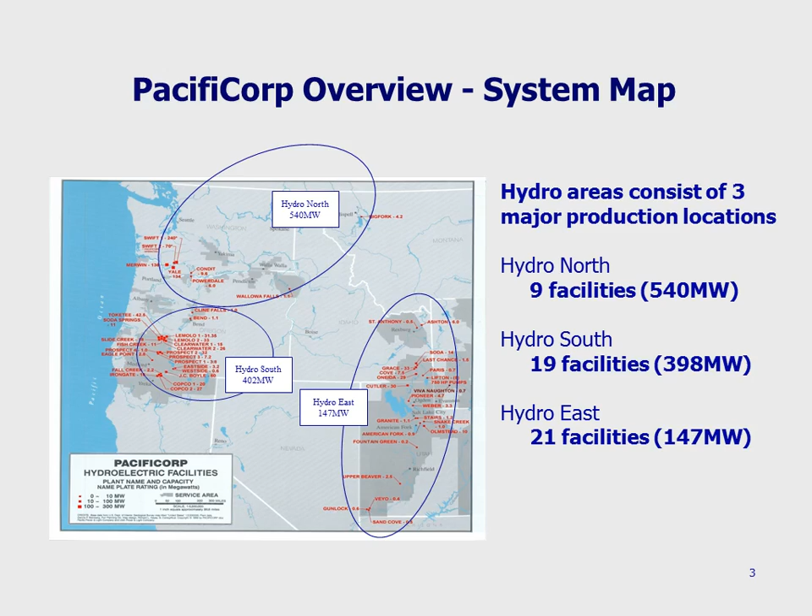So, PacifiCorp Energy, we are a large electric utility with, I think, upwards of 2 million customers. Our service territory is in Utah, Wyoming, Idaho, where we do business as Rocky Mountain Power, and Washington, Oregon, and California as Pacific Power. Hydro is only about 10% of our total generation portfolio, but as what the company considers a renewable resource, it is very important to our hydro generation.

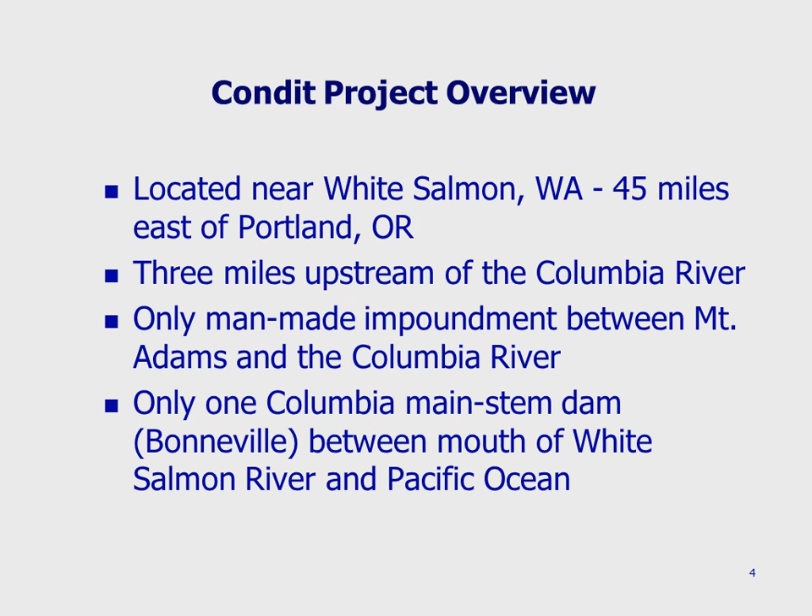The Condit project is located in White Salmon, Washington, on the White Salmon River. It's about 45 miles east of Portland. The dam was 3 miles upstream of the Columbia River. It was the only man-made impoundment between Mount Adams and the Columbia River, and there's only one dam on the Columbia between the White Salmon and the ocean.

Project location, you can see, where's the, now what? Center button. Oh, there we go. Okay.

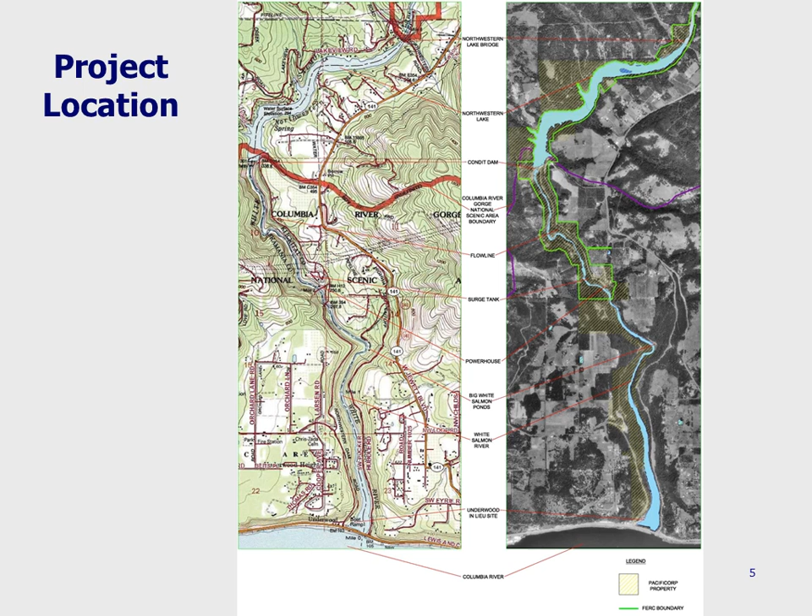The reservoir was about 2 miles long. From the map, you could see it was kind of a long, skinny reservoir. 92 acres total, fed by the south side of Mount Adams, which is glacier fed. And the most important thing about the reservoir to remember is there were 2.4 million cubic yards of sediment trapped behind the dam.

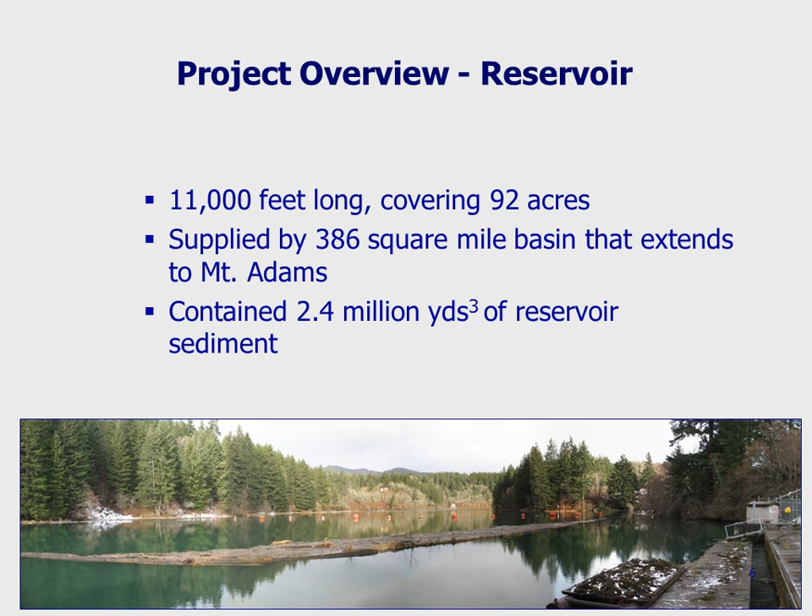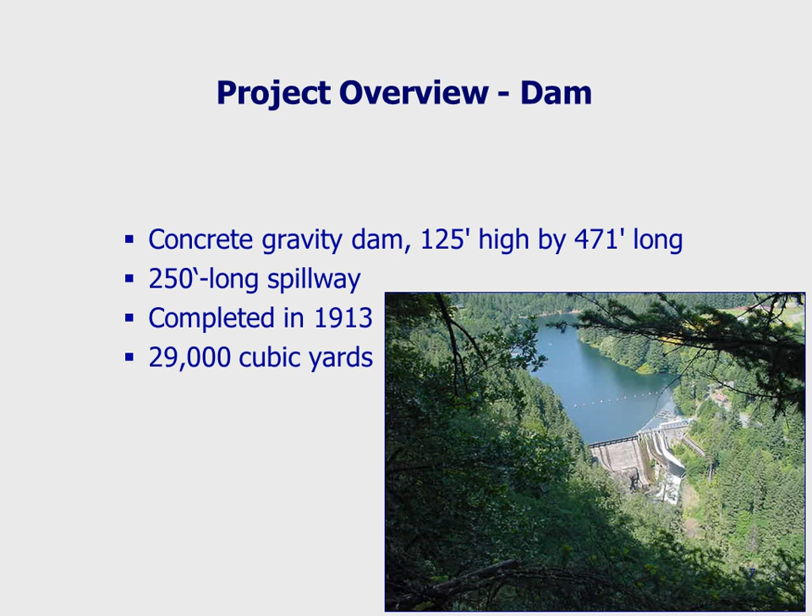The dam was, I guess you would say, a moderate-sized dam compared to some of the enormous dams we have in the Southwest, but it was 125 feet tall and 470 feet long. And the important thing to remember about the dam is it contained 29,000 cubic yards of concrete.

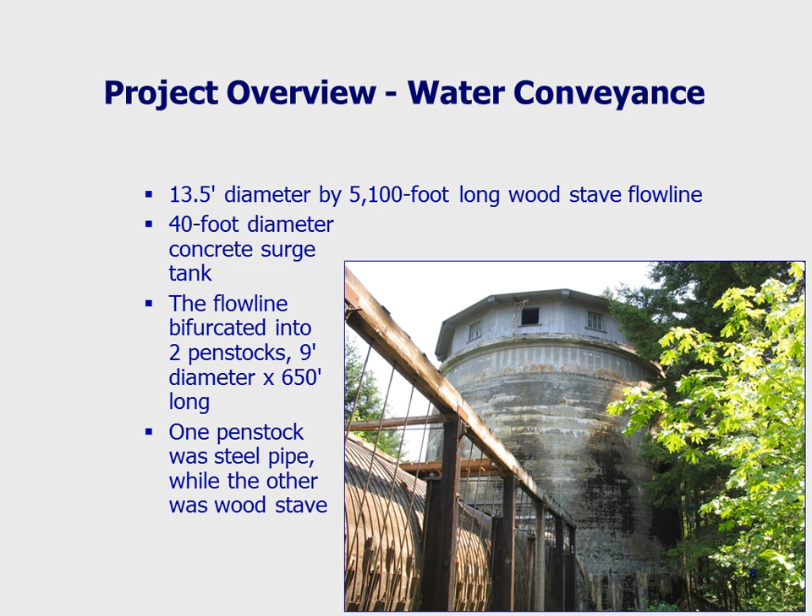So the project had a water conveyance system, which was essentially this large wood pipe that you see on your left that fed into a surge tank. The surge tank then divided into 2 pipes called penstocks that fed the powerhouse. And the most important thing about the water conveyance system is it was about 1 mile long. So there was essentially a road cut along the east side of the White Salmon Canyon, and the flow line was built in this road cut.

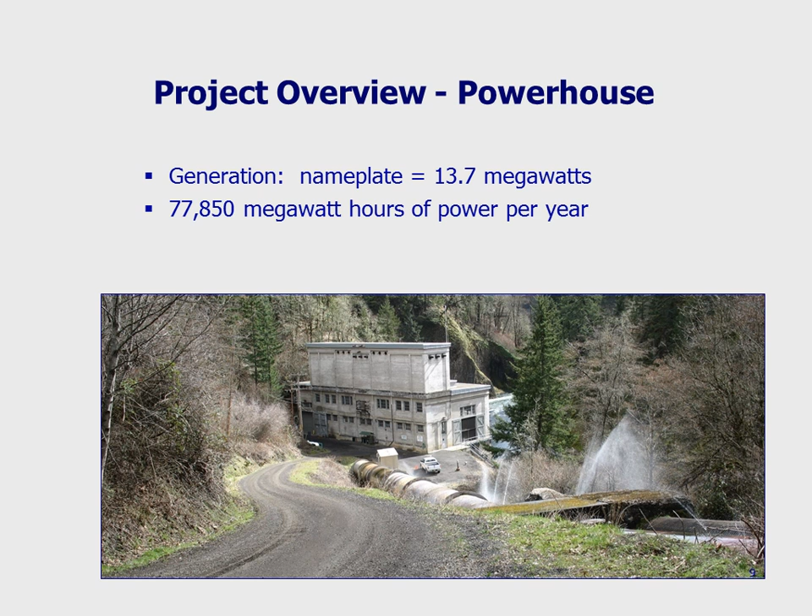So the powerhouse was about 14 megawatts, and that's about 77,000 megawatt hours of energy per year, which is roughly enough energy to power about 7,000 homes. So not a huge project, but moderate size, modest, we would say.

As most of you probably know, any non-federal hydropower project requires a license from the Federal Energy Regulatory Commission, and we have to renew those licenses periodically. Condit was actually built in 1913. It went for many years without a license. For some reason, I'm not exactly sure why, the company had to get a license in the 60s. It was a 30-year license, so that license came due in the early 90s.

And FERC, as we call them, must go through the NEPA process to issue a new license. So therefore, the company had to prepare a license application with detailed information on power, the need for power, environmental resources, cultural resources, recreation, and the socioeconomics of the project.

So for a quick chronology, the company began working on the license application and preparing studies in December of '88. The application was filed in December of '91. Fish and Wildlife Service basically placed fish passage conditions under the Federal Power Act. The Fish and Wildlife Service and NOAA Fisheries have the ability to require fish passage at the project. The project had no fish ladders.

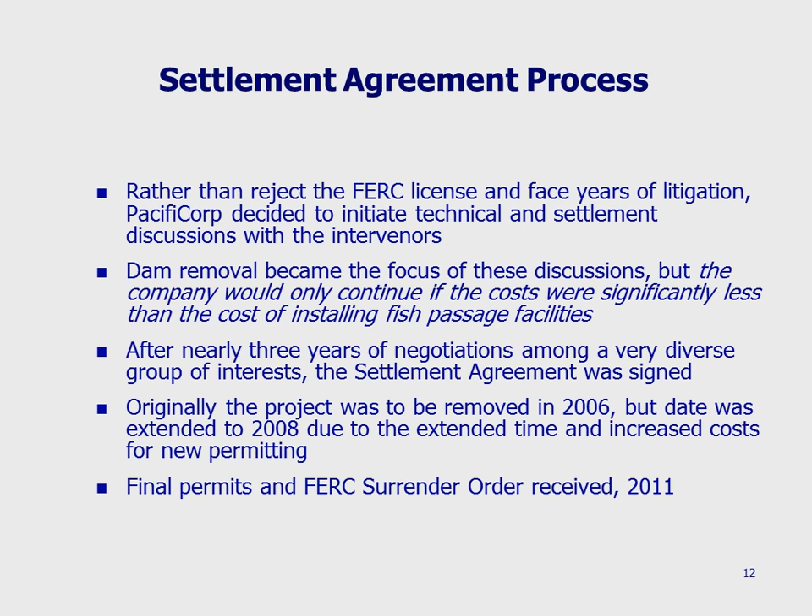So the details of the agreement called for it to be removed in 2006. The agreement was reached in '99. Everybody knew there was going to be a lot of permitting involved. So initially, we were supposed to remove the project in 2006. We, however, did not get the final permits and the FERC order until late 2011 and early 2012.

So certainly there were a lot of NGOs involved, and the main services, federal agencies involved, but it was really largely CRITFC and the Yakama Nation that were the first ones to really propose removal in a serious way, and they were quickly followed by the agencies.

So just a quick look at chronology. We entered settlement negotiations in '97. We reached agreement in '99. We had to go through a whole NEPA process for the removal, of course. We had to get a biological opinion on removal because there's an endangered salmon in the river. And then in July 2004, we started this long, arduous process of pursuing a 404 and a 401. And that's really what took so long.

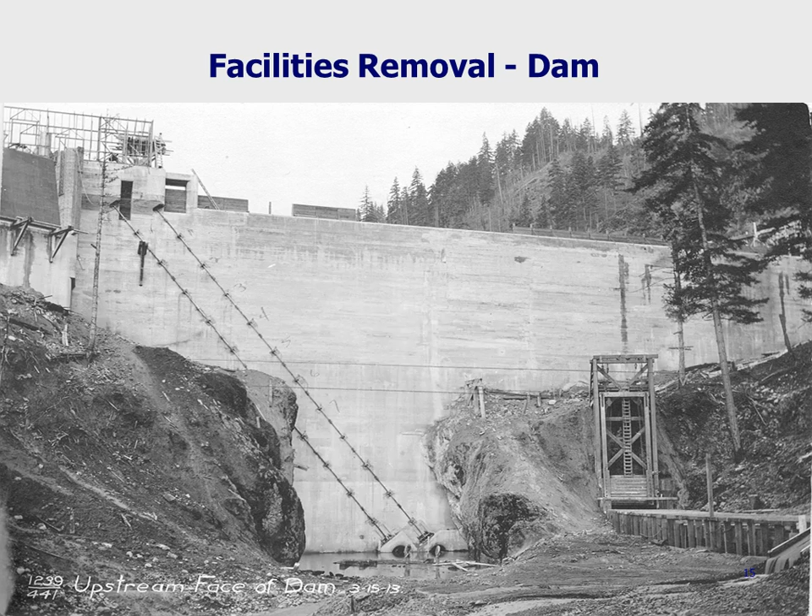Looking at what the removal project calls for, this is an original photo of the dam right before the reservoir was inundated. This is the diversion structure. So the entire flow of the river was diverted through this tunnel under the dam while the dam was constructed in the dry, and then they filled this tunnel with rock and blocked it. Dam is gone. That's the big plan, remove the dam.

So how do you remove the dam? We blast a tunnel from the downstream side in the very bottom of the dam right here. These are the sluice gates that were installed to sluice sediment out of the reservoir, which, interestingly enough, were initially installed with the construction of the dam with the intention of sluicing sediment annually, and they never did it. Not once did they ever open those gates and sluice out sediment, because they were so afraid that a log or some debris would get stuck in there that they wouldn't be able to close them, and the whole project would become basically a failure.

So in order to remove the dam from the downstream side, we coffered it off and began excavating this tunnel. The dam is about 100 feet thick at the base, and so we basically tunneled in 90 feet with blasting and excavators, just removing mechanically the concrete out of the tunnel. And then on breach day, by dynamite charge, blasted out the last 10 feet and drained the reservoir in one quick

instant, basically. So initially, the thinking was that it would take about 6 hours to drain the reservoir, and that the flow would be around 10,000 CFS, which is not really that high of a flow for this river. That was well within a 3 or 5 year flood, I believe. Once the reservoir is drained, the entire flow of the river is going to pass through that tunnel for about 9 to 11 months or so.

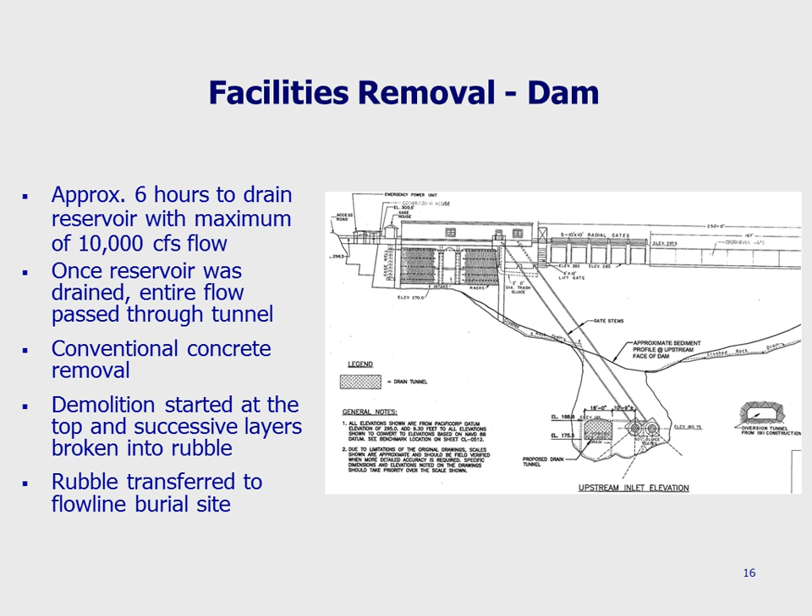We're doing a typical concrete removal, basically breaking it up with jackhammers that are mounted on large excavators and hauling it off in trucks, breaking it up into layers. And then the last bullet, and one of the big issues was finding a place to dispose of the concrete. We'll get back to that. So other facilities to be removed: the whole water conveyance system. Those are the penstocks on the right on their way down to the powerhouse.

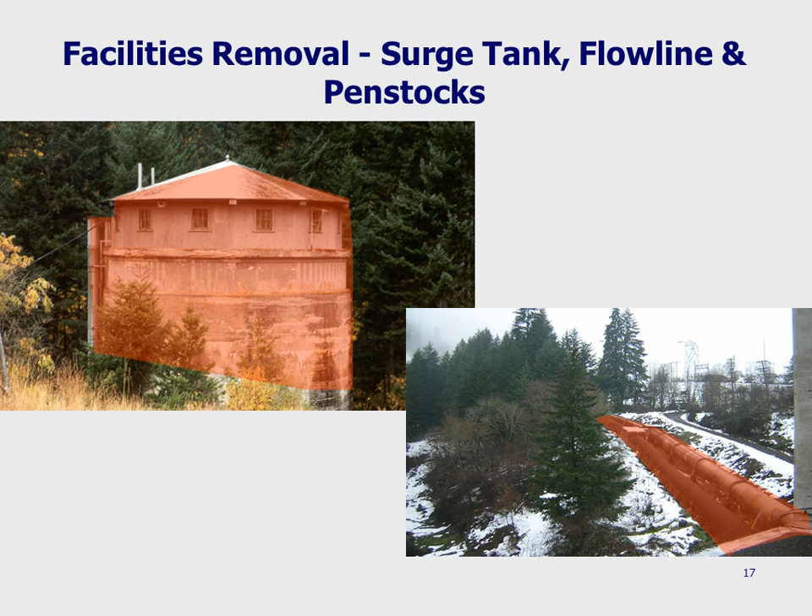The important thing to know about the Flowline removal is this road cut I was mentioning earlier, and that wound up being the place where all of the concrete from the project was disposed of. So we buried about 35,000 cubic yards of concrete along this road cut. It wound up being about 3 feet thick, and then we covered it with soil and are going to revegetate it.

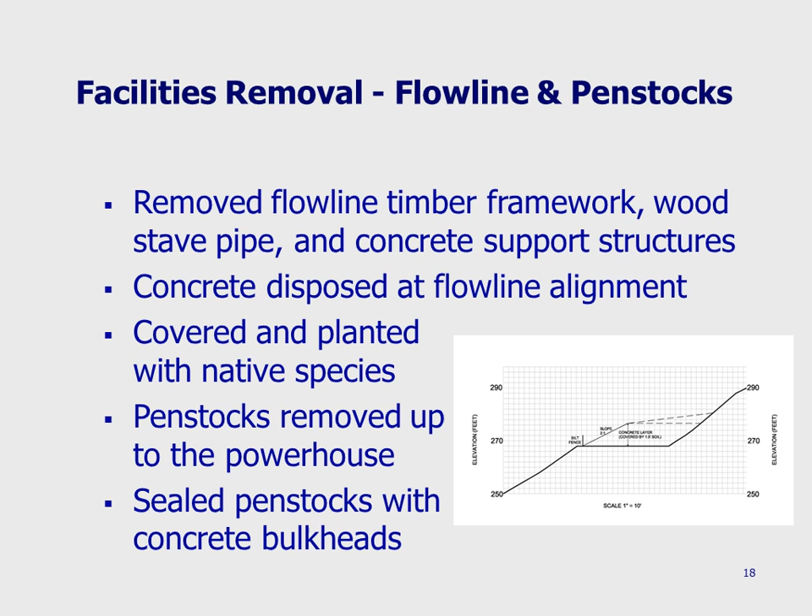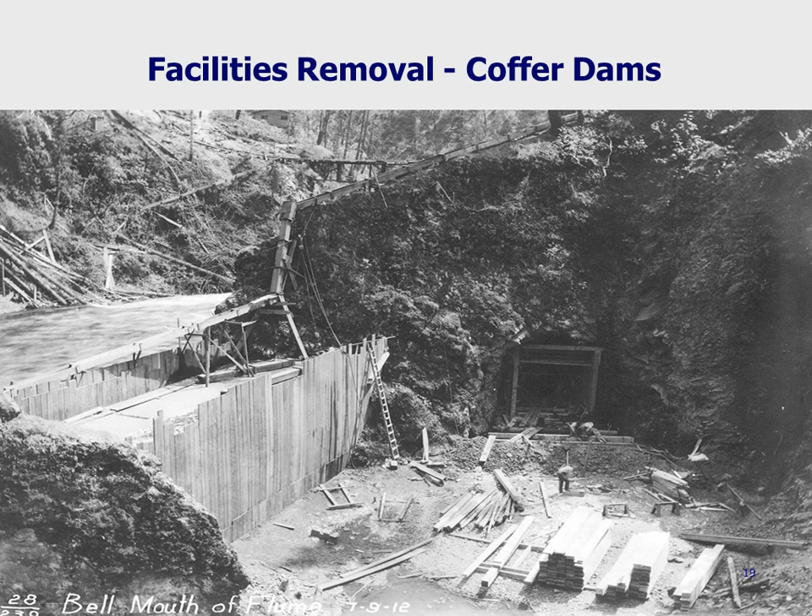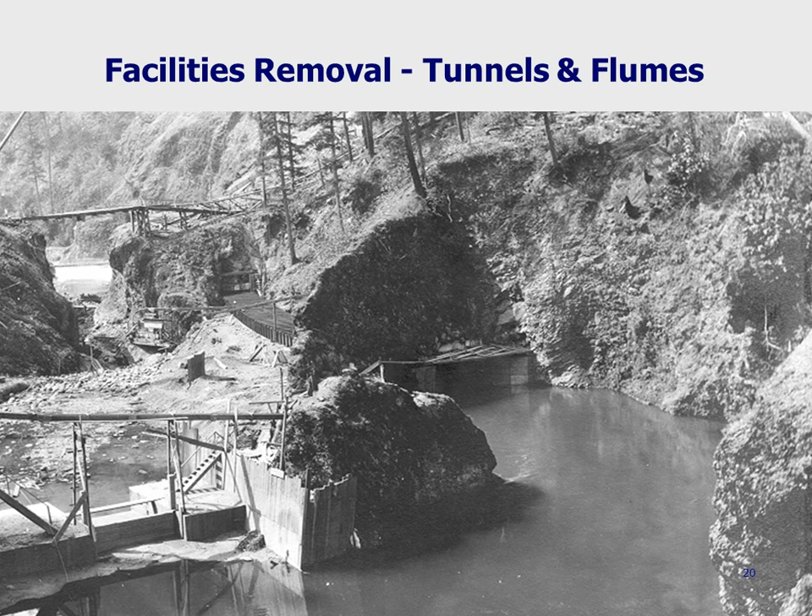So other facilities to be removed: there was a very elaborate coffer dam and diversion system. So that's all going away. This is the dam site right here. The dam was built right there. So this is just a historic construction photo; all of this stuff was just inundated and left. So the company had to remove all this material.

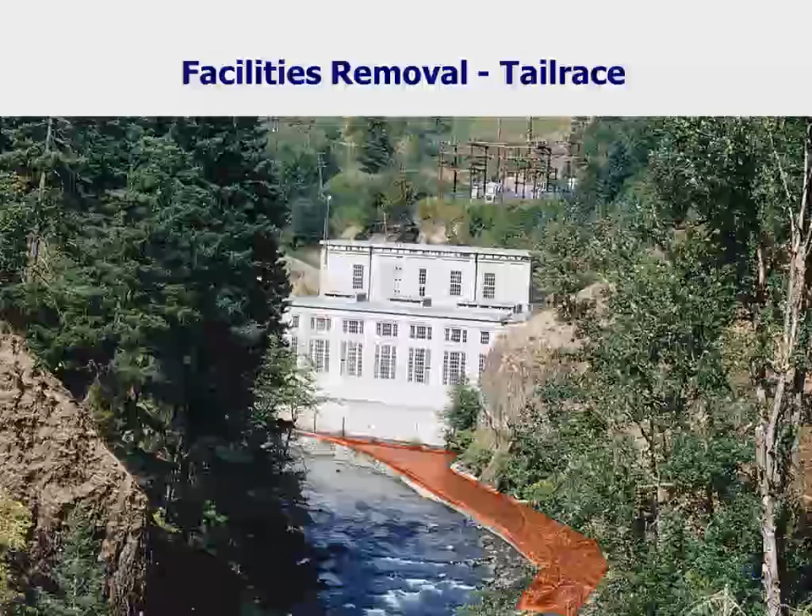This is the powerhouse, the only facility of the project that was to remain. The whole hydro project was National Register eligible. It was very key in electrification of the region. It was actually built by a paper mill company just outside of Portland in Camas, Washington. So the only portion of the powerhouse that was to be removed is this tailrace feature, which had obvious fish habitat issues with it. So we had to work in the wet to essentially remove that.

So back to our chronology. In August 2011, we began decommissioning efforts. By October 2011, we ceased generation. So we did generate all the way up until breach day, just about 45 minutes or so before the breach. They shut the powerhouse off for the last time. By January 2012, we were beginning demolition of the dam. By February 2012, we began grading in the former reservoir to try to get rid of all of that sediment that was behind the dam.

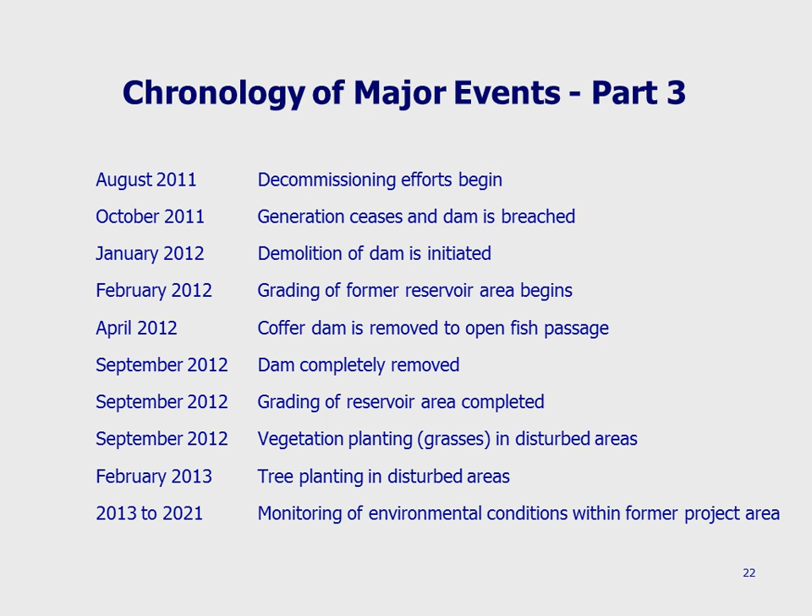By April 2012, that coffer dam we talked about was completely removed. By August 2012, we saw anadromous fish moving upstream. There were steelhead above the dam site, so they literally swam up the tunnel that summer after the breach. And then by September, we had the dam completely removed and began the process of revegetating, which we are still currently working on. And then in the future, we're going to be doing some ongoing environmental monitoring. So one of the conditions of our 401 application is that we monitor the situation, sediment in the river, for the next 10 years.

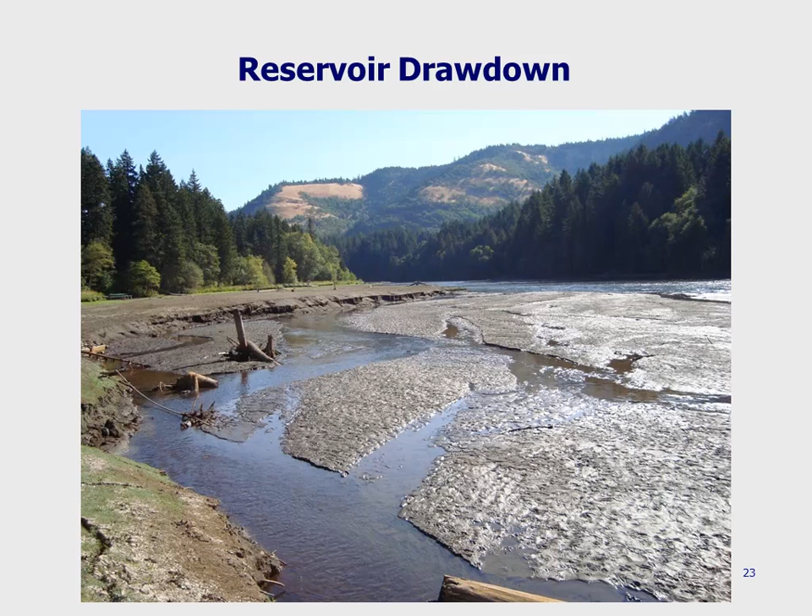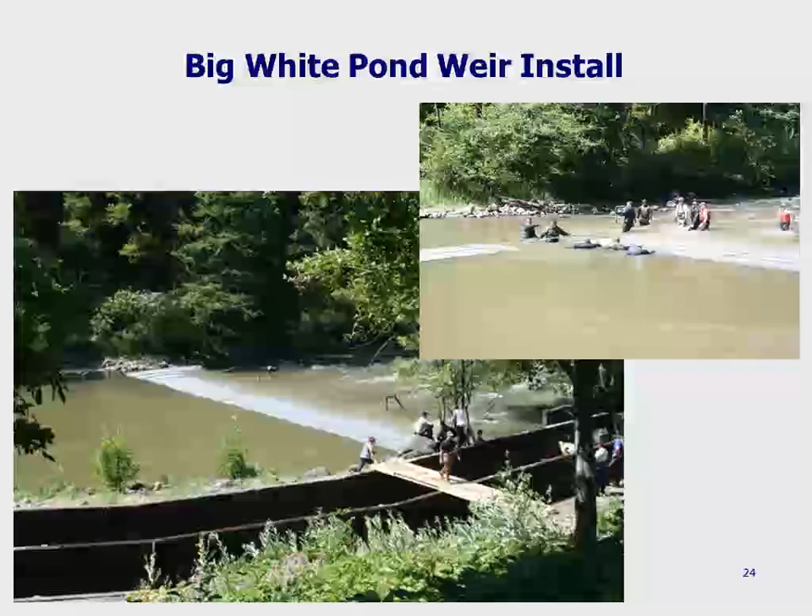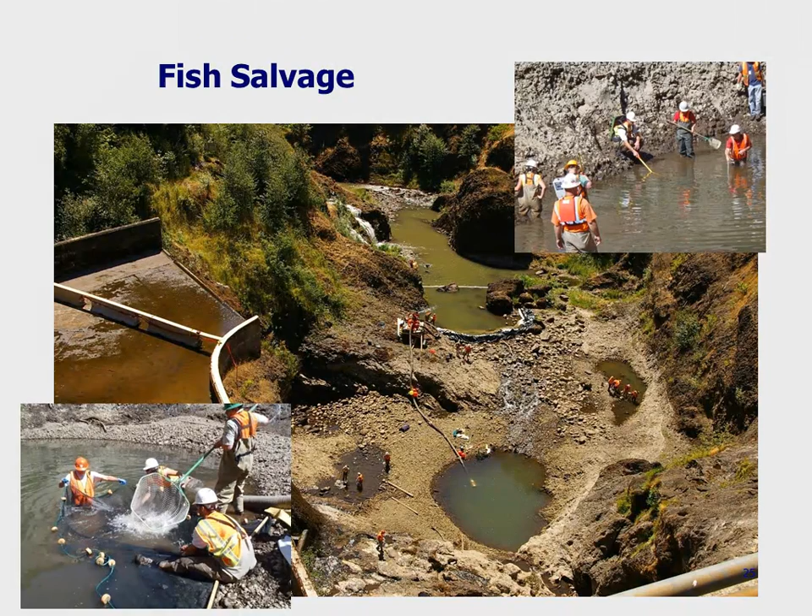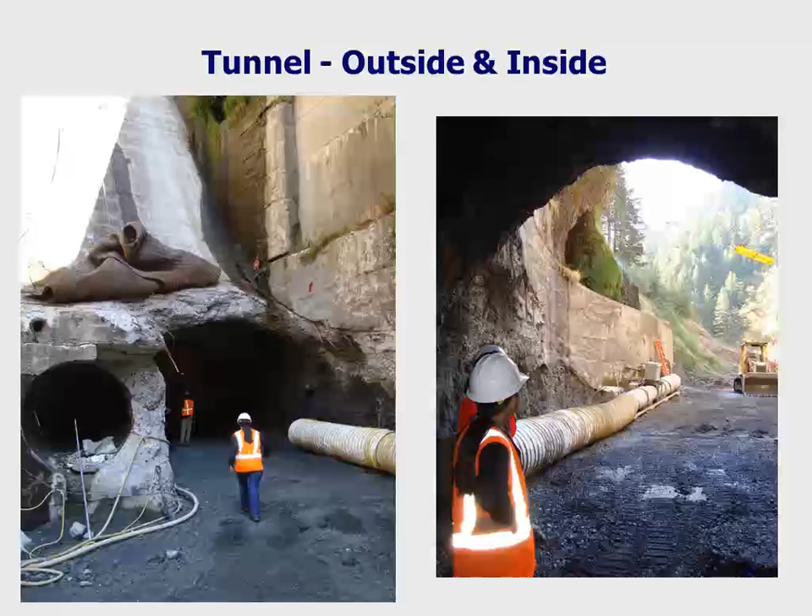So really quickly, the first step was drawing the reservoir down to minimum pool. We installed a fish weir below the dam. This is prior to the breach, trapping salmonids, releasing them upstream so that they could spawn above the dam site, knowing that the spawning beds below the dam site would all be obliterated by the breach. We then did a fish salvage. This is immediately below the dam. We maintained a minimum in-stream flow by tapping the penstock right there. So that water is coming directly out of the penstock. We're still generating at this point. Then we began the process of tunneling on the downstream side of the dam in the dry. Here's a couple of looks inside the tunnel.

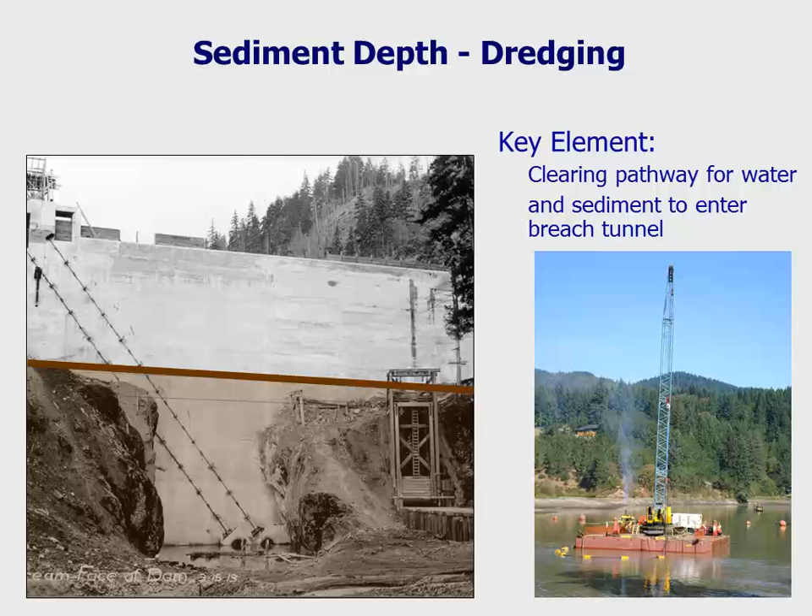The sediment issue. So the picture on the left indicates the sediment level up against the dam. Clearly, a lot of sediment needed to be moved out, and we had to dredge out the sediment on the upstream side down to the base because the hole's going to be here. So this dredging operation went on for about 3 months to basically remove all the sediment to create that bathtub drain.

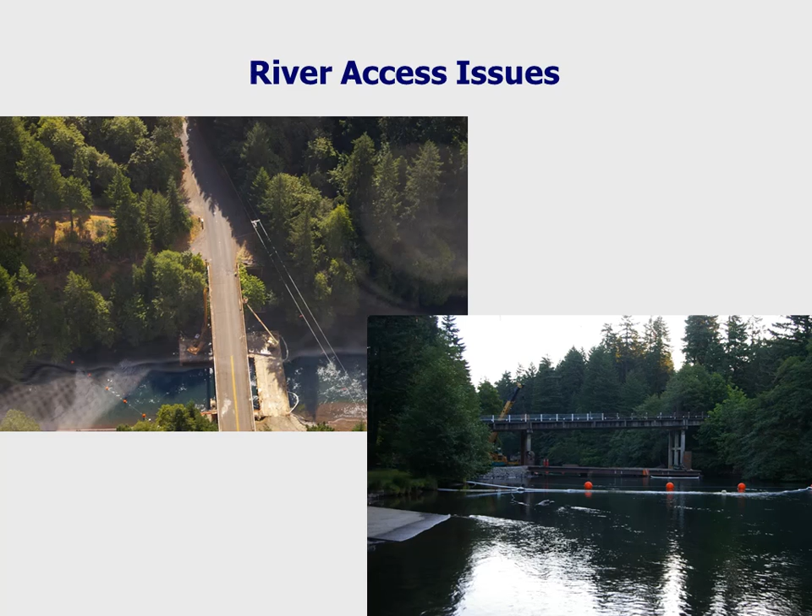Well, the bridge was engineered to be sitting on a reservoir, not on an active river channel. So we had to completely rebuild these two pylons and constructed this pier all the way across the channel. So there was no way in the world for rafts to pass through here. And what we wound up doing was the cabin owner, there's a cabin right in this area, was nice enough to allow us to basically take over his property. So rafts would take out right above this boat barrier and walk up this scaffolding that we built, and we built a hot loading zone and turnaround in his backyard.

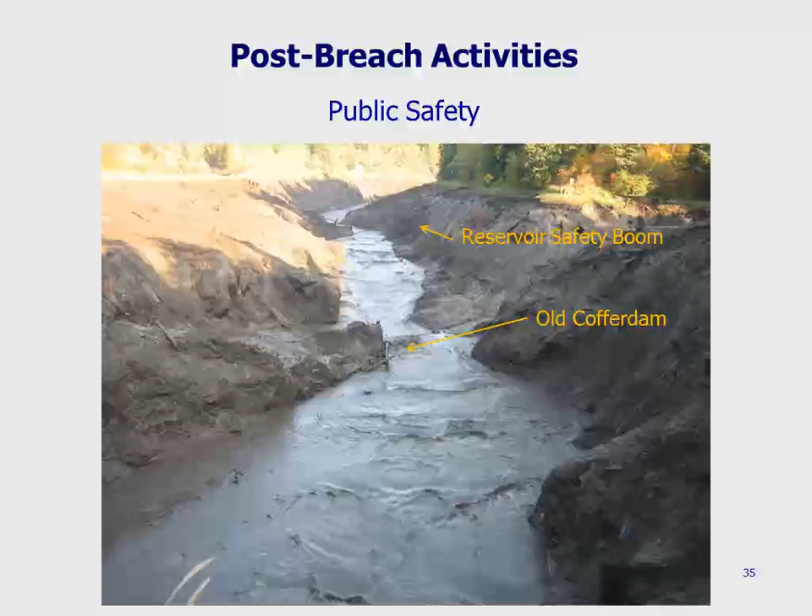There were a lot of public safety concerns. Obviously, this whole project was a huge interest to the public. All these slopes are very unstable, waterlogged, fine sediments. Our old boat barrier became this broken cable in the river. We've got this old cofferdam. Here's a picture of the coffer dam several months later.

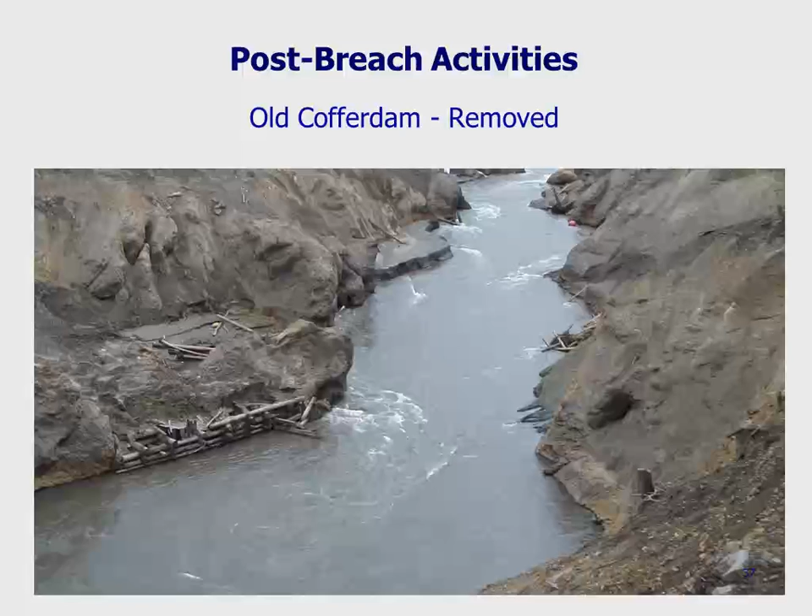Clearly a boating hazard. So we had to really do a lot of due diligence to maintain public safety and keep the area clear. We did remove the cofferdam, which was a very elaborate operation in and of itself. They had to construct a road down this drainage and literally just broke it up with 2 excavators and pulled it out.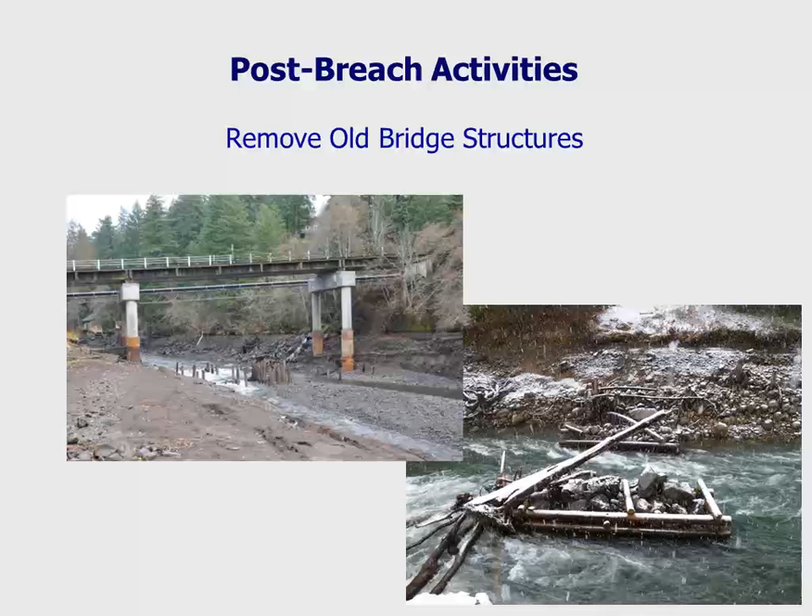Another issue was, this is back at the bridge on the upstream side of the reservoir. So you can see how much down cutting has occurred. This is probably about 4 months after the breach. The sediment level was right up around there at this dark line here, right below the rust stain. And there are all these old bridge structures that were in the upper river, some of them even Native American bridges, and we had to remove all that material as well.

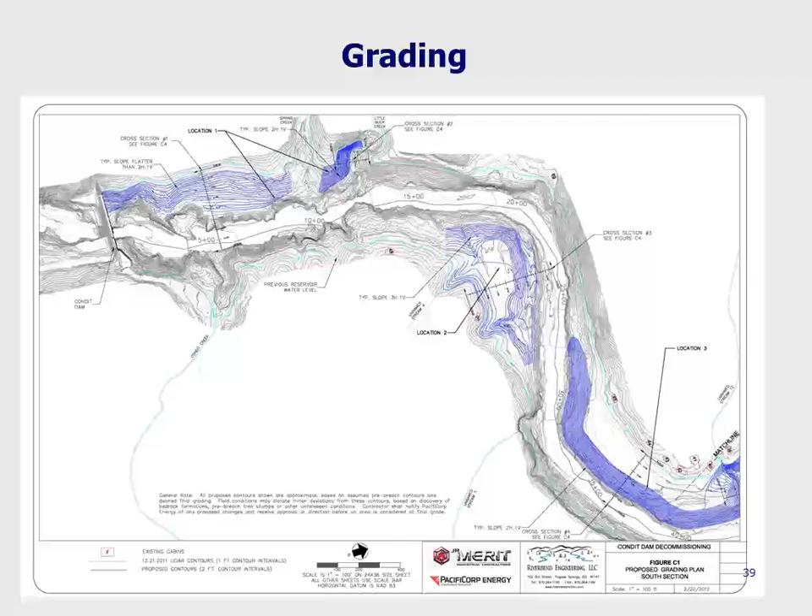The next issue was the grading of all the sediments that were deposited. So we developed a grading plan, and all of the area in blue, this is one of, I think, 4 different map sheets, engineering drawings of the reservoir, and all of these blue shaded areas are graded mechanically and excavated. So once again, 2.5 million cubic yards of sediment. What do you do with it? You go out with an excavator and you just push it all into the river.

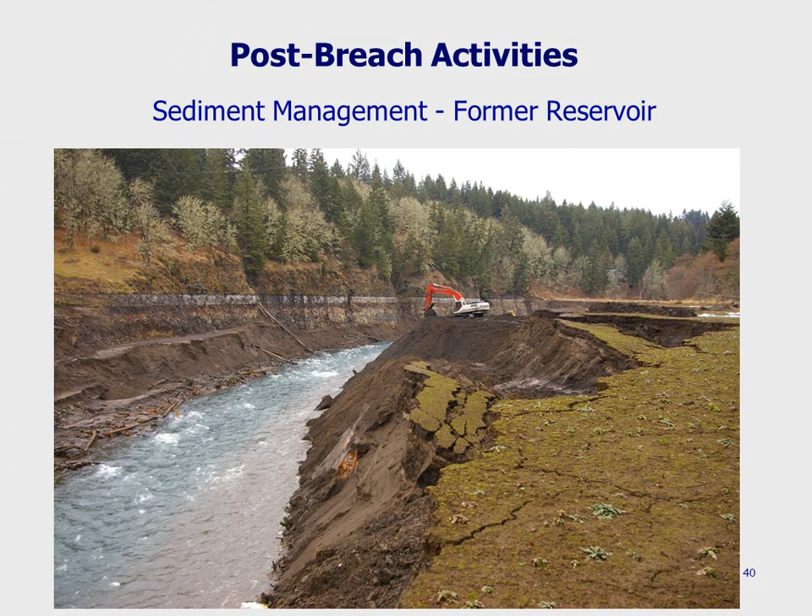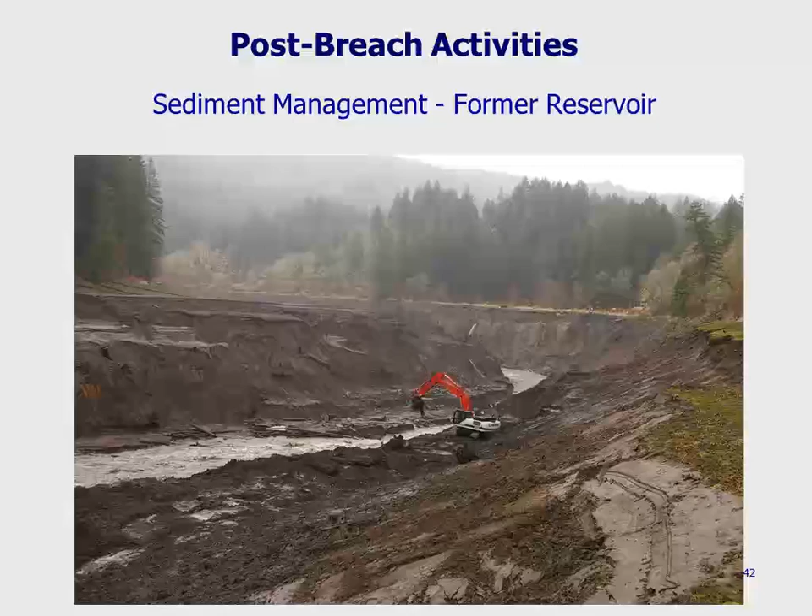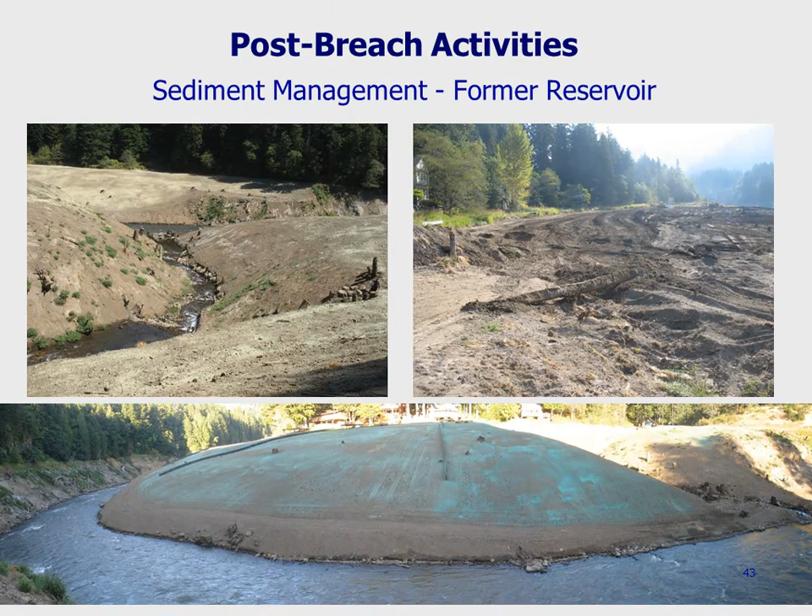So the next slide, take a note of this rock band. This is the same rock band. So this is that same landform about 4 months later. So we completely had to recontour these areas with excavators. So here's sort of a look at some of the work we had to do to reestablish side channels. And then once again, just recontouring the entire area. The green is a tackifier because we had a lot of dust problems, and we had to try to abate the dust problems because there's cabin owners right around the former reservoir during the entire time, their summer homes.

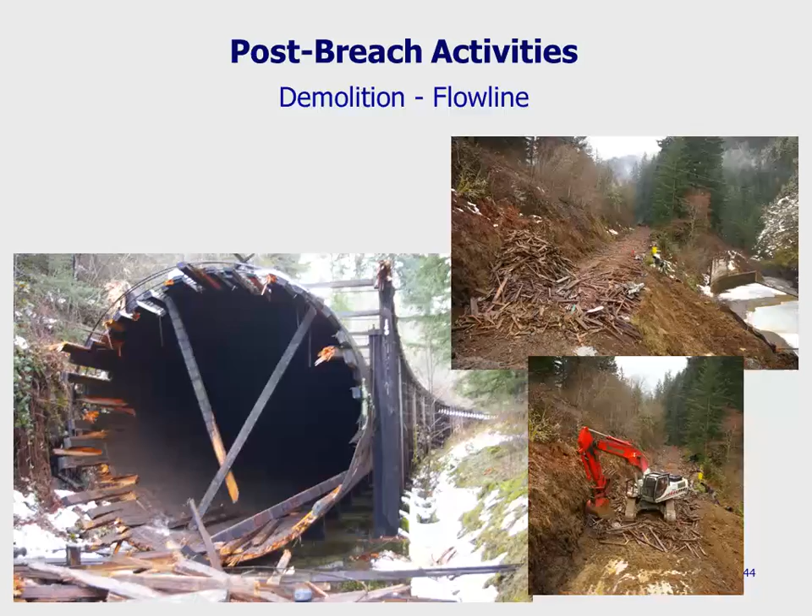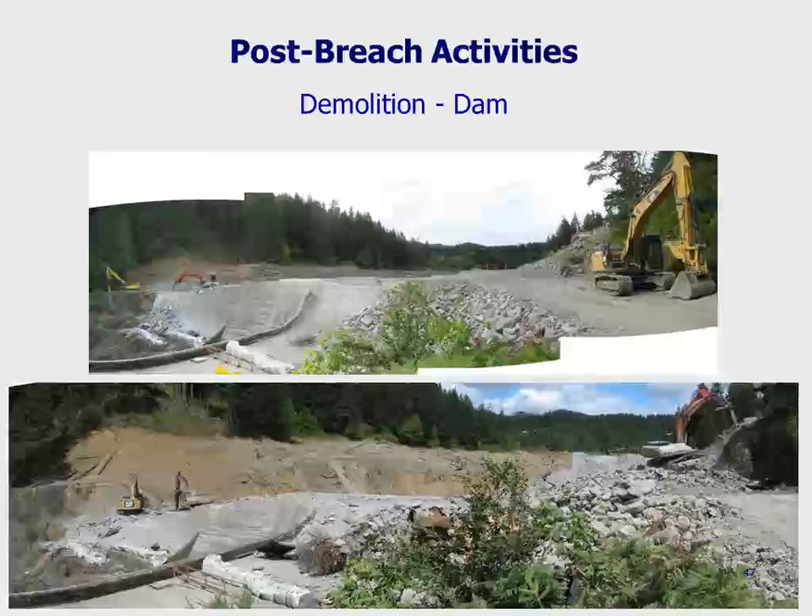So looking at the flowline demolition, this is that road cut I spoke about. And finally, the dam demolition, which was a very long and drawn-out process of just slowly but surely chipping away at the dam. By last summer, we had it down to this level. And then finally, by late summer, we had it down to just this concrete plug in the very last little nook. And then the final excavation was done with this long arm excavator.

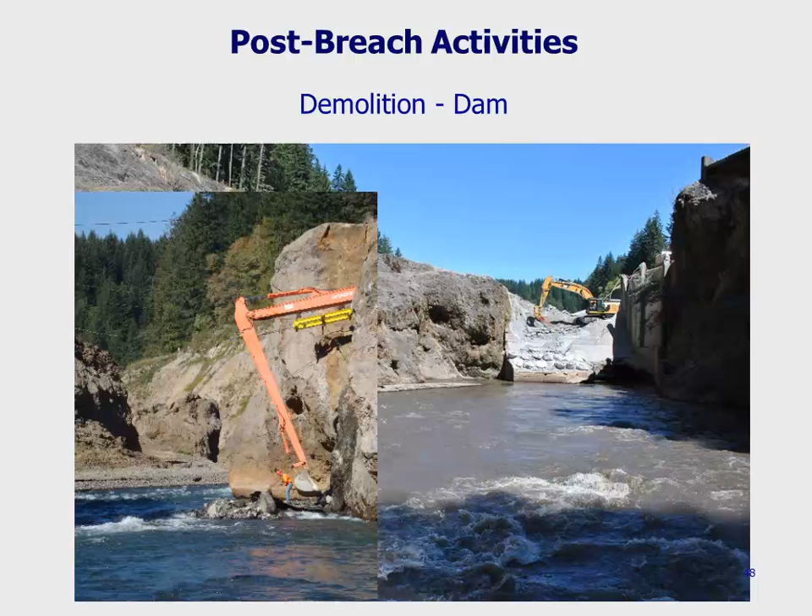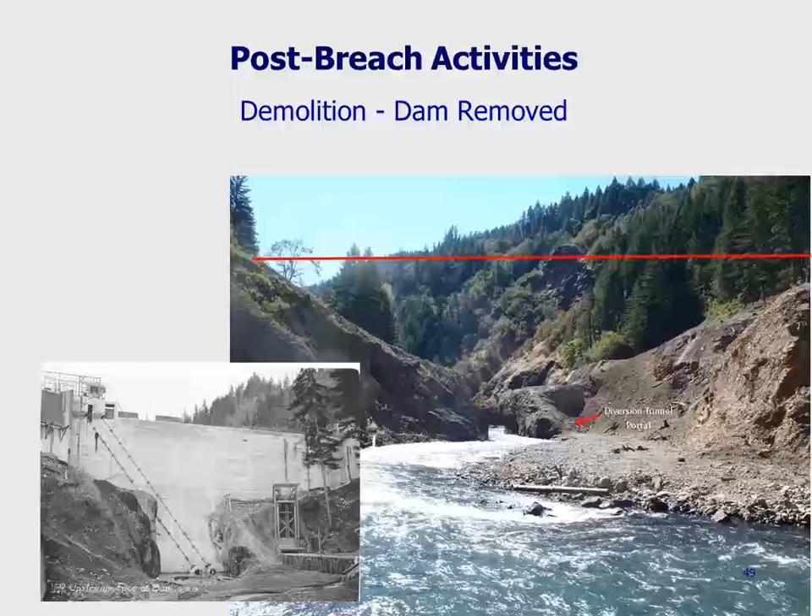We actually had 2 excavators down in the river at one point, pulling out concrete debris. And then finally, with this long arm excavator and this cable yarder, it's logging equipment, and there was a bucket that would hang from that yellow piece of steel that they would move concrete debris into and then haul it out. So this is an upstream look at the dam site. Here's the diversion tunnel. Here's where the diversion tunnel was filled in, and the dam is clearly gone. So this is a downstream view of the dam site. I actually took this photo on my cell phone in October of last year.

For recreation, once again, we had this major takeout. So this is the boat ramp that outfitters used to take out. This is about 20 feet of downcutting that the river has done since the breach. And we had to do this whole bridge project where we redid these piers.

Then immediately after the breach, this concrete retaining wall wasn't there. That was all just an earthen bank. And that started to go with all of the downcutting. The engineers knew there was going to be downcutting in this area, but nobody really knew how much or how serious it was going to be. So we had to do the engineering and do this soil nail wall project, it's called.

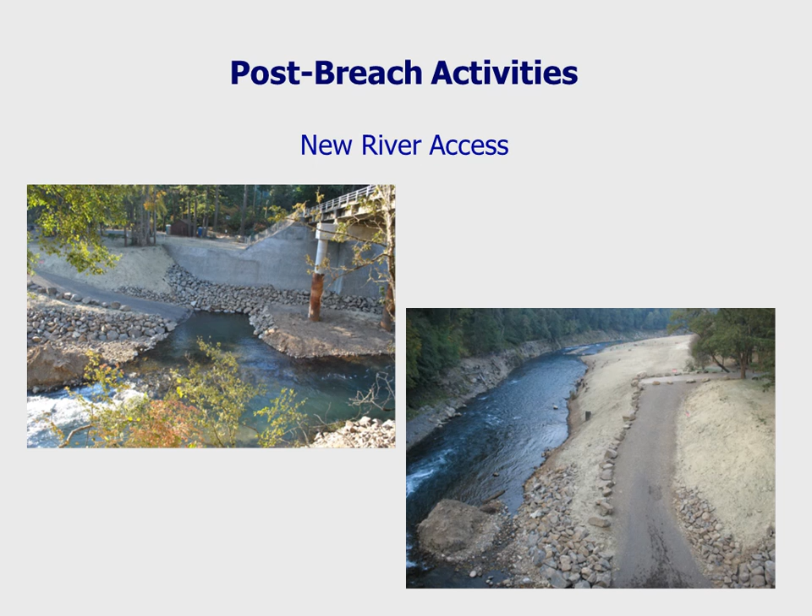And as part of that, we conveniently engineered ourselves a little eddy, and this is the new takeout. So we just kept the concrete pad from the old takeout and did this road cut down into this eddy, and that's our new takeout. And we're just really hopeful that the sediment isn't going to just take it away from us in the next few years.

Down at the mouth of the reservoir, this is a Native American in-lieu fishing site. Prior to the breach, this was all just water and part of Bonneville Pool. Where did the 2.5 million cubic yards of sediment wind up? Right here at this delta.

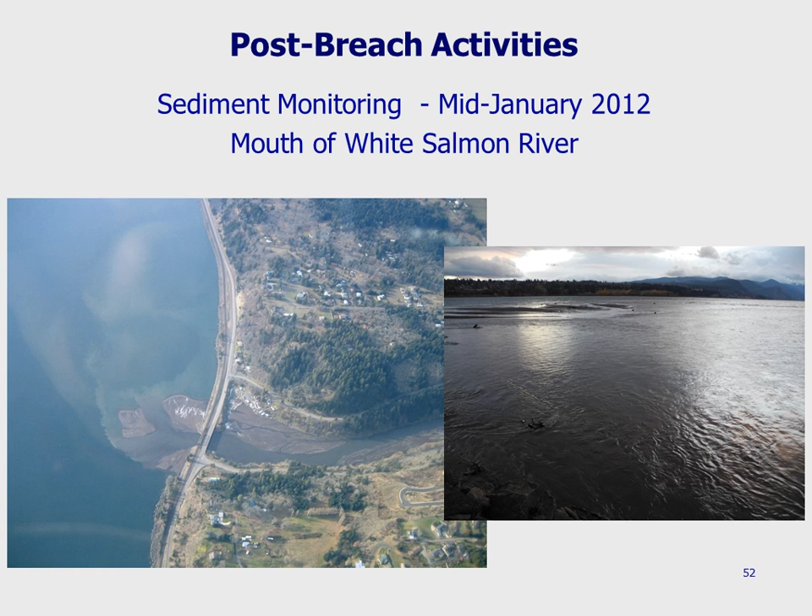And it's interesting in that all of the other major tributaries to the Columbia River in this section, the Hood River, the Klickitat River, Wind River, they all have these deltas except for Condit because they didn't have major dams on them. And so, from a recreation perspective, there's a whole new kiteboarding opportunity right here on this nice little beach that's formed out there. It has made things very interesting for the in-lieu fishing site because their boat ramp is completely silted in and unusable.

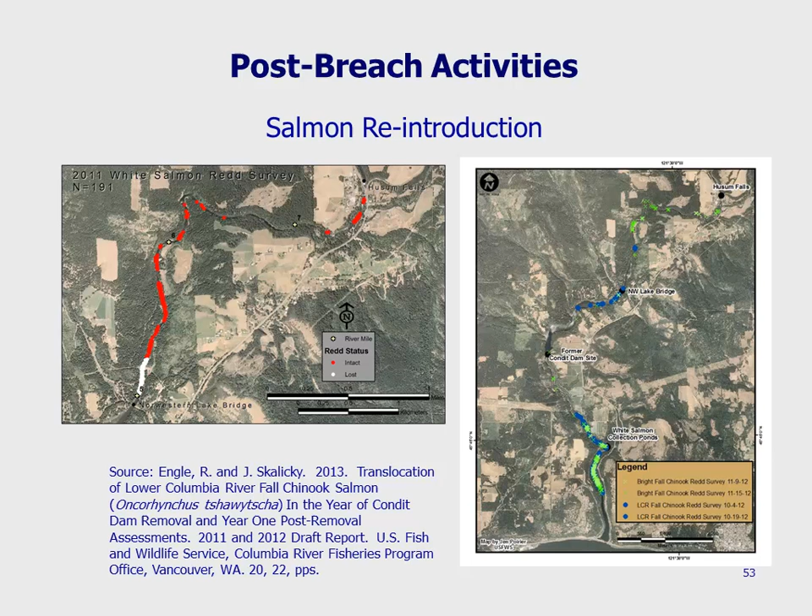Well, this whole thing was done for salmon. So what's happening with the salmon? This is where all the spawning took place in that summer of 2011. After we installed the weir, we took the salmon up above the reservoir, reintroduced them, and all of the red dots are spawning beds. The white here are spawning beds that were lost post-breach from all the downcutting that occurred. But clearly, there's a lot of good fish habitat above the reservoir site. And then here we can see this past fall, spawning occurring in the former reservoir itself.

For revegetation, we've got about 50-some acres to revegetate, and we've planted over 16,000 trees. We did grass plantings last fall. We had a very mild winter with a lot of sun, and that was really good for growing ryegrass, which was great. So you can see the ryegrass starting to reestablish. This is a side channel where we're essentially reconstructing riparian habitat in these side channels. This is another side channel here. This is that same landform we were looking at earlier.

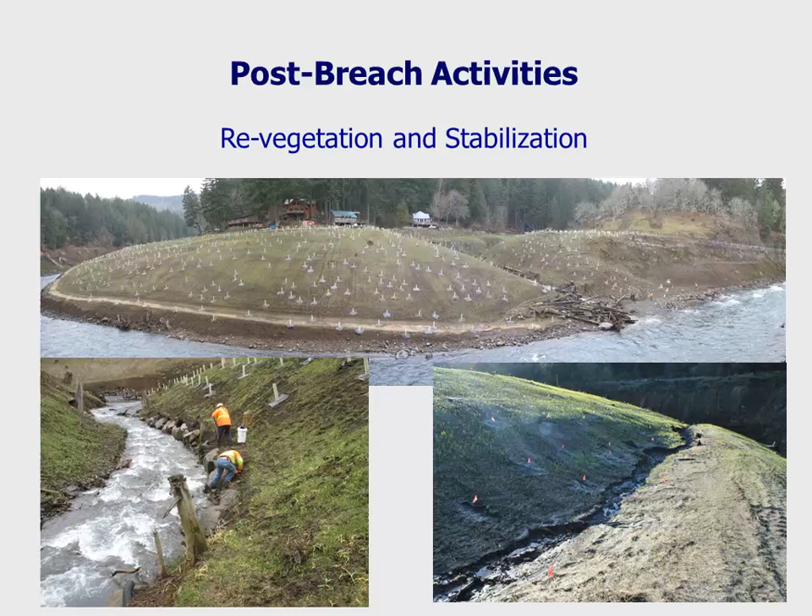We are having some issues with erosion. In this area right here, we're losing quite a bit of the contoured bank, and that's something that we're going to have to monitor for the next little while. And we did also engineer some log jam structures along the way, which was slightly controversial.

So for future activities, it's largely a monitoring issue. As part of our 401 certification, we have to monitor water quality and turbidity for 10 years after the breach. We are hopeful that we might be able to demonstrate that we're meeting our water quality standards for 2 or 3 years over the next 5 years and be able to meet our obligations early and therefore not have to monitor for that full 10 years, but only time will tell.

So we're going to be putting a lot of effort into our revegetation. The salmon issues we're largely turning over to Yakama Nation, which is a co-manager of the fishery with the state of Washington, and they're really managing the reestablishment of the fishery. The entire project is on PacifiCorp property. So PacifiCorp is largely responsible for the terrestrial restoration.

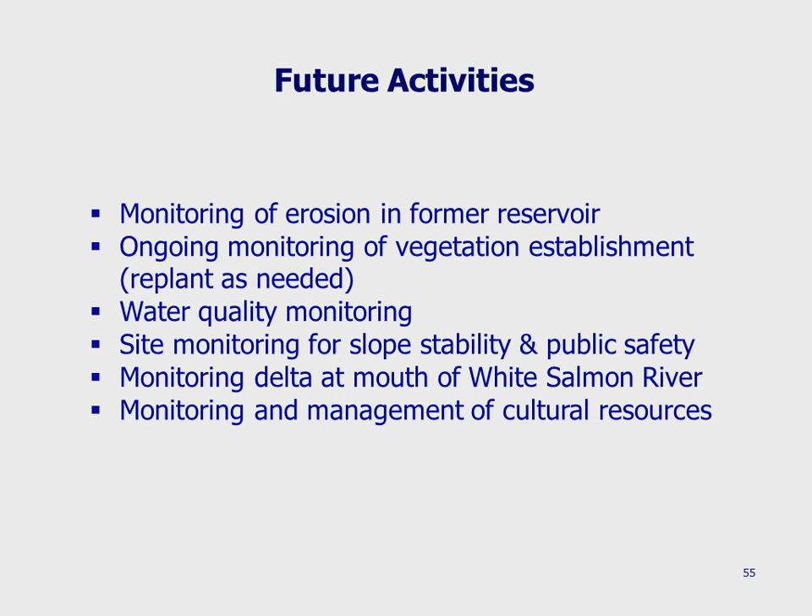And of course, we did have one significant cultural resource site that was exposed by the draining of the reservoir. And there's at least one traditional fishing location right above the dam site in the former reservoir. And we're working with Yakama Nation to potentially look at future fishing opportunities there for them.